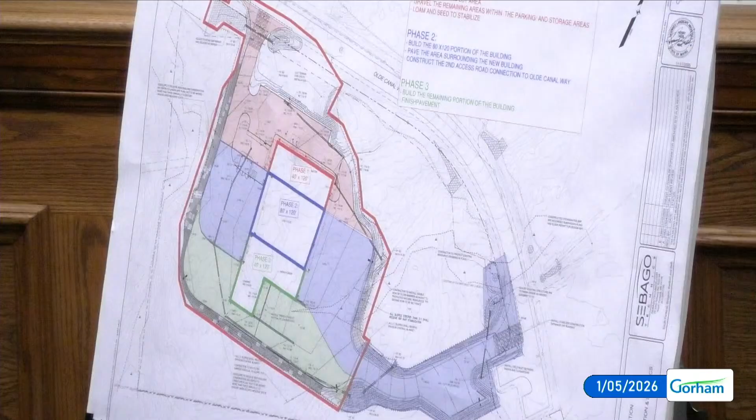Some of the remaining items I saw in the comments regard the lighting. We did submit a lighting plan. I did note that it was recommended we provide lighting by the entry. We can certainly add light by the entry there before submitting final plans. And in that same vein, we'll submit a full-size lighting plan for clarity, so folks can see the full cutoff and all the specs along with that.

The site itself, per the previous DEP SLODA permit, was allowed a maximum impervious area of 2.71 acres. We've only proposed 2.4 acres on the site, so we are compliant with the current permit out there. And the max allowed development area is 3.13 acres, and the proposed development area is 3.03. So we're still below the threshold for requiring any amendments to that existing permit.

I guess with that, that's certainly turned over to the board for any questions. I did want to note, Ms. Ironman did say it, but there is some wetland impact on the site. The previous approval was impacting about 2,628 square feet of wetland. This site, as proposed, is proposing a little under 300 feet less, at 2,365 square feet, so a little less than what was previously proposed.

The site does have an entry on Olde Canal, very similar to the previously proposed location, and then actually an additional entry or exit, as it were, to suit the circulation of larger vehicles there, adjacent to the hammerhead along Olde Canal. So I certainly yield my time back to the board and look forward to answering any questions you may have.

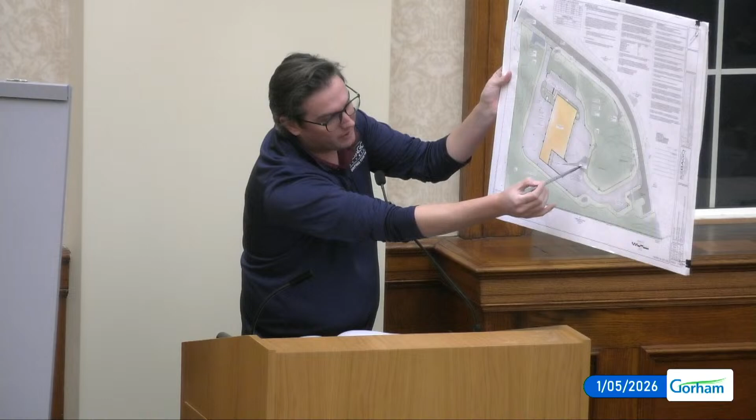Ms. Nichols: I'm just wondering if you could point out where the wetlands are. I don't see them identified. Certainly. So the wetlands are along the edges of this dashed line here, and what's being impacted is this section, hatched. We call it kind of the back side of the building. There's a little point that sticks out into the pavement on this map. That's where you can see it's about 2,365 square feet.

Different sheets serve different purposes. Just to clarify, so that large area that looks like it's surrounded by tree line, if I'm reading that right, that's all wetlands? And the only part impacted is that one? Let me describe that a little better. You may see some dashed lines with a wetland symbol. The easiest one to see it on might be, honestly, L100. You could also look on the site plan as well. It should be on each sheet.

L100 is very clean in terms of it not having extra contours or utilities. It's about the 4th or 5th sheet back. It is the landscape sheet, the 6th sheet back, I apologize. If you're looking behind the building, you'll see a tight dashed line that comes to a point near what would be the loading dock. That is the extent of the wetlands through there, that tight dashed line, and that's being filled. Now, there is a small pocket that does continue down towards Olde Canal, but that's not being impacted.

Thank you. You're welcome.

Ladies and gentlemen, this is a public hearing. If there is anyone that would like to speak in favor of this project, please approach the podium, state your name and address for the record. If there is anyone that would like to speak against this project, please approach the podium, state your name and address for the record. Finally, if there is anyone that is neutral about this project that would like to speak, please approach the podium, state your name and address for the record. I see no one rising. I will close the public hearing.

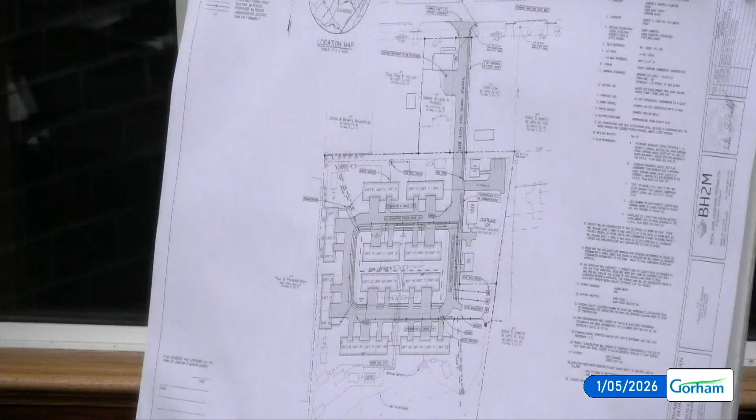There was some discussion of making this a right turn only off of the route. So we had some discussions surrounding how that would occur. And now that's part of the reason you've gone to the widening of the road and doing the turn lane. Correct.

So the intent would be they'd be able to access that turn either direction? Correct. That was a huge part of the discussion, and it was really driving the project, to make sure we got the access to this parcel to work and be safe. So that's ultimately where we've gone and how we've ended up where we're at.

We did, full disclosure, present 2 different layouts of a potential turning lane to the town. We met with Chuck and the peer review engineers and looked at 2 different alternatives. This was the preferred alternative, I think, by everybody. So that was the approach that we've gone with.

Okay, thanks. Anyone else? Mr. Walsh? Yeah, I guess the question was raised earlier about the number of units. And Andy, can you speak to that? I can.

I know we'd run density early in the project. I thought we were at 32 units, but I can rerun that again and confirm. It sounds like, Damon, you're saying we're at 31 units. That's correct, based on the area, and if you want to double check, that's certainly something we'd welcome. Perhaps with your updated survey information, you've shown the area being different from what was listed. Could be. I'm fairly confident we're at 32, but I'll be sure to check that and confirm with you guys. And there is a unit on the site, and that has to be counted as well.

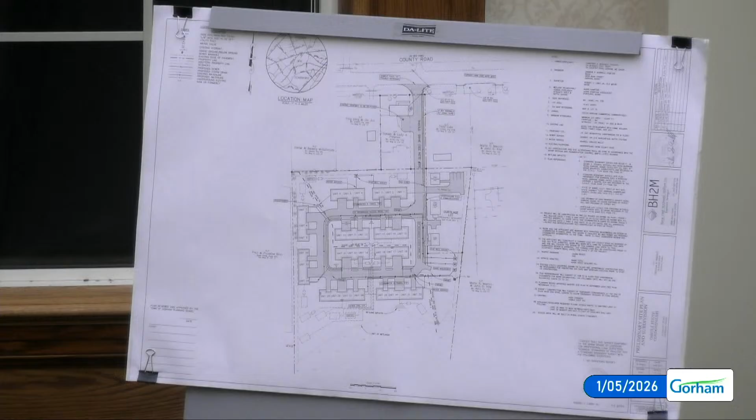Members of the board, for me personally, I'm looking at, it's an improvement, but on pages 20, 21, 22, 23, 27, 28, 29, 30, 31, 33, 34, 35, 36, 37 the entire page, 38, 39 almost the entire page, 40. Many issues are highlighted for us. A little heartburn, I guess, is the best way I can describe it.

To the Planning Department, are you in some kind of uneasiness as well, or are you feeling good? I would prefer less yellow, that is true. I am confident that Mr. Morrow and his capabilities can get it to be absolutely none by the time he applies for final plan review, but I leave it up to you as a board.

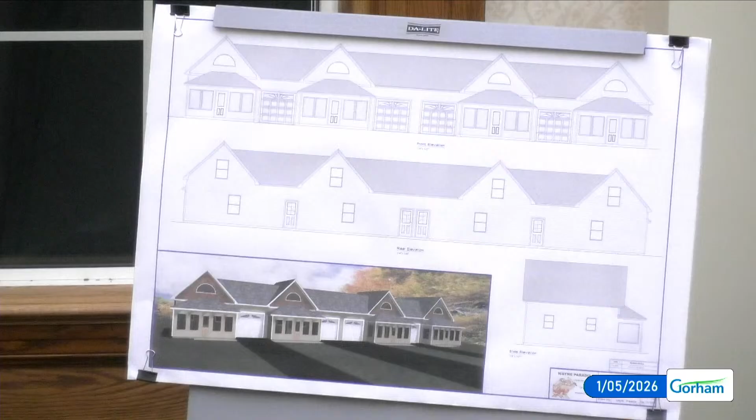Mr. Frank? I'm very curious, Andy, where can we go to have a firsthand look at Mitchell Woods condominiums? Well, that's what it says on your thing, Mitchell Woods condominiums. Yeah, that was the previous name. We changed the name of the project since we submitted to you. So this was a copy from something already built? No, that was the previous name, we changed it. Okay, changed it. Whoops, I apologize, I didn't mention that, so I probably should have. I apologize.

Look at it. I know. All right.

Anyone else on the renderings? Yeah, it appears to me that they meet the standard, just looking at what's required. You've got the differences in materials and the facades, some nice architectural features, they look good.

Is this for units 25 through 28, or 29 through 32, the four units? Because the other buildings are 3-unit buildings. Right, but I'm assuming they'll all be the same facade. I would think so. They are, yes.

I don't mean to be facetious. A lot of the yellow was taken care of with the waivers - the buffering, landscaping, and lighting. I concur with Mr. Frank's comments and his faith in the planning staff.

Hi, Gary Jordan. Thank you. No, that is not the intent - exact opposite. This is where, and I haven't dealt with the rear parking lot requirement much, but this is where this particular development gets a little bit weird, because you ask the question: what is my road frontage? What is the back of the building? What is the front of the building? Where is the back parking? Where is the front parking? I would defer to this board and Carol and Damon to help out with that. My intent would be that the front, the most beautiful side, the architectural design side, would be the one facing the roundabout, not the rear of the building for truck access for drop off of supplies or something. That would be, I hope, silly.

So no, the front of the building would be facing the bypass. The back lot would be for the back parking area for more residents and more long-term steady state parking is the current thought process that we're open-minded on.

Although, just to connect it all, there's no access from the roundabout today, and I hope one day that changes, but that's correct today. Still looking at that, because it makes it difficult. When you're driving, that's the major corridor going in there, and yet if it's the back of the buildings, obviously it's highly beneficial. Parking in the back is maybe something we need to look at how that's configured, because I agree completely.

Mr. Walsh? Interesting project. You kind of surprised me.

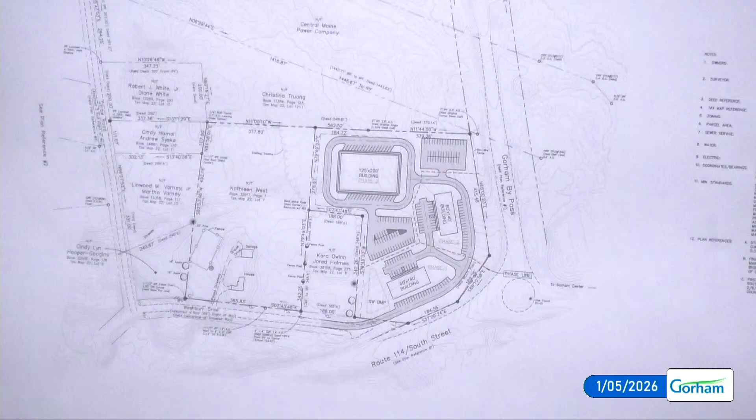Okay, and then the other thing I was thinking, when you do phase 2, you might want to think about connecting the upper end of the phase 2 building road, building parking lot, to the road. Just a little bit of a thing there. Just a thought, that was all I had. Thank you, Mr. Frank. Anyone else?

Moving along, we have suggested motions on page 12 of 12.

It might be blatantly obvious only to me, but it's very difficult to approve a master plan where they have to redesign the entire thing to meet the street standards and the block standards. Because it doesn't look anything like it would look like. This is supposed to be a master plan, so it has to look like what they intend to follow through with. Right now it's a concept - a great concept plan for feedback, but in terms of a master plan, it doesn't meet the criteria yet.

Thank you, I think that makes a lot of sense. Knowing that a master plan ties us to a layout moving forward, we want to make sure we get a layout that we can make work. We'd like to get as much direction from you guys as we can this evening, and then we can go back to the drawing board and come back with a layout that meets all these items we've talked about and all these aspects of the ordinance that we need to meet.

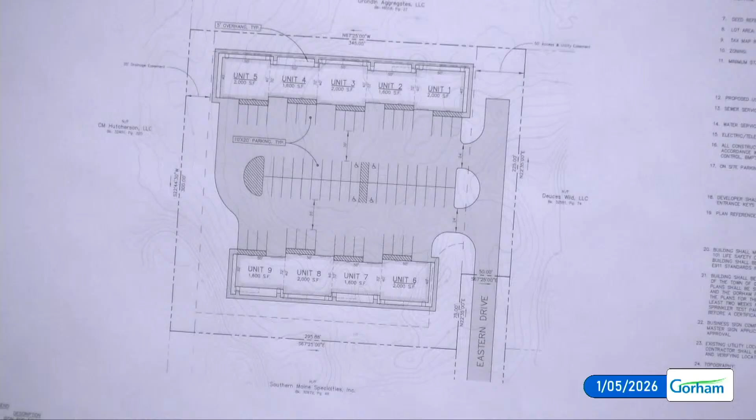We talked about the parking. As Carol mentioned, there's a lot of parking shown here - 65 parking spaces is what I've shown. Basically, what I did with this layout is put the two buildings on there, then maximized everything else in the middle. Not knowing what's going to be in these units, we didn't want to limit ourselves. Some of the things we talked about were making some of these parking spaces in the interior of the parking lot like a pull-through truck and trailer parking spot.

I think there's going to be a lot of that happening on this site. A lot of plumbers will pull up with their truck and trailer with piping on the rear, and they can use these parking spaces. I think doing some striping in the middle of the parking lot to provide easier access to some of these units. That's another item we talked about with department heads, and I think those make a lot of sense, and the applicant's willing to look at that as we move forward.

There's certainly some requirements on parking lot size and portions of the parking lot that need to be landscaped. We'll certainly look at that moving forward, make sure we meet that portion of the ordinance.

We also talked about sidewalk connections, adding an internal sidewalk that would connect the southern buildings over to Eastern Drive. I think that makes a lot of sense. We'll certainly add that moving forward.